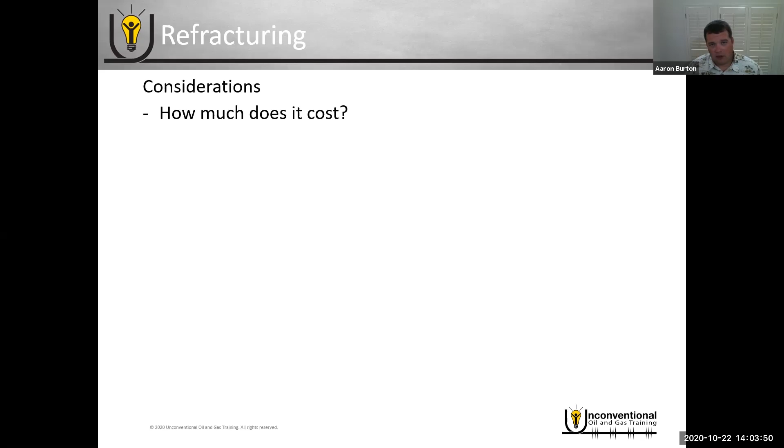So let's look at the considerations for refracturing first off. Especially when it comes to downturns, 2015, our current downturn, the main question is how much does it cost? If you look at unconventional wells, they're a little bit different than a lot of conventional completions because, in a lot of conventional plays, drilling can be 70, 80, 90% of the overall well cost, whereas in unconventionals, it's about a 50-50 split. And in some cases, the completion cost can actually be higher than the drilling cost. But if we just assume it's a 50-50 split...

...you still have that level of uncertainty as far as will the refrac work? A lot of the uncertainty revolves around why did the production decline in the first place? It's very difficult to kind of pinpoint that, which also makes it difficult to determine the likelihood of success with refracturing as well.

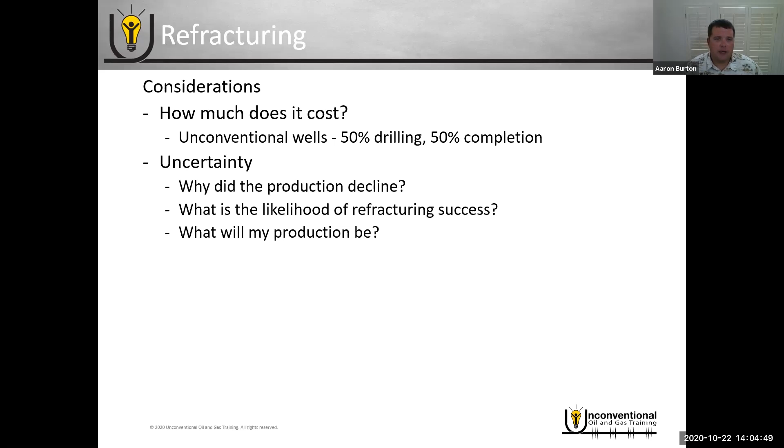So those are kind of the unknowns with production results. The main question really and truly revolves around production decline, which can be anything from proppant crushing to proppant embedment to scale, things like that. And the reality is the best we can do is make an educated guess, but that is what it is. It's still a guess in most cases. So we're learning a little bit more about these plays, and it'll be very interesting to see what evolves. But overall, at least from what I'm seeing on my end, the discussion right now in October of 2020, refracturing discussions are still happening, but refracturing activity is not happening as much.

My general observation when I talk to operators is that when we hit steep downturns like we're having right now, or like in 2015, operators become more risk averse. They look at it and say, theoretically I could refrac a well at 50% of the cost of a new well, but I don't know what the results will be. I could get no results and waste that money. But if I drill a new well in a formation I know well, I have a good idea what production will look like. So they take the mentality of let's just drill and fracture a new well and get competent results. I expect that to change as we learn more about refracturing and become more confident in it. I think this will be a big topic going forward, especially as the industry recovers.

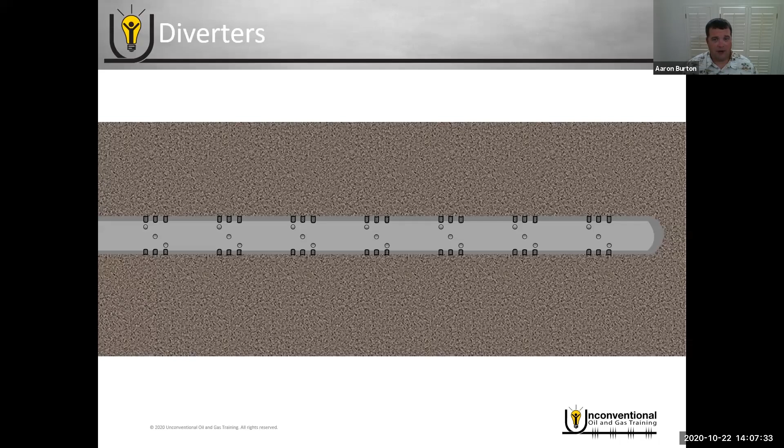So far, one of the more common ways operators have attempted refrac is diverters. This is very similar to the intra-stage diversion we looked at with plug and perf, except instead of 6 to 12 clusters in an individual stage, now you may be looking at hundreds of clusters throughout an entire well bore. It's a grossly oversimplified assumption, but for the most part operators just assume they place one big frac job down this well bore with multiple holes, and they have to assume most of the fluid and proppant go out of one set of perforations. So they'll pump the fluid and proppant they want for that section, and then pump enough diverter to block off the near well bore and force the fluid to divert out of another set of perforations.

As an added comment, these perforations may not be just the original completion perforations. If you went back to a well that was 10 years old in the US, the perforations may have been spaced 200 feet apart, whereas modern completions are typically 20 feet, give or take. So if operators go into one of those wells where each perforation is 200 feet apart, they may run a bunch of wireline runs and add perforations to the well. So you may actually be trying to stimulate new perforations as well as old ones from the original completion.

Once you pump down that other diverter, it forces the fluid to divert into yet another perforation, and they just repeat that process. Like I said, it's a grossly oversimplified assumption to visualize it this way, but outside of adjusting based on what they're seeing pressure-wise during the refrac, that's about all they can do — make an educated guess and certain assumptions. Overall, the upfront cost is relatively cheap for diverters and it's relatively simple, but the uncertainty is how well you're distributing your refrac.

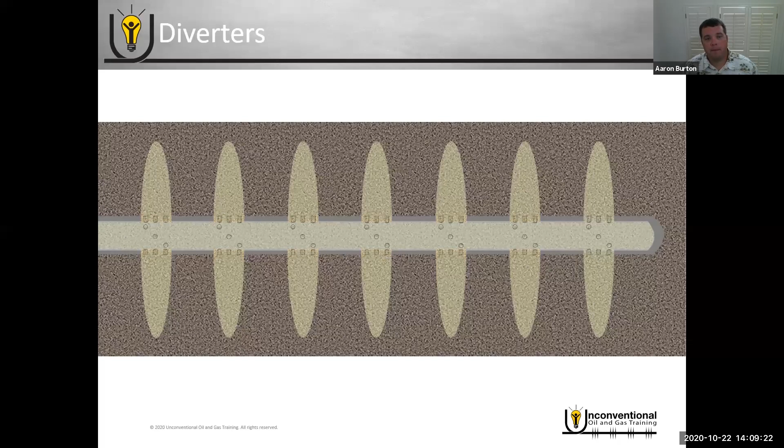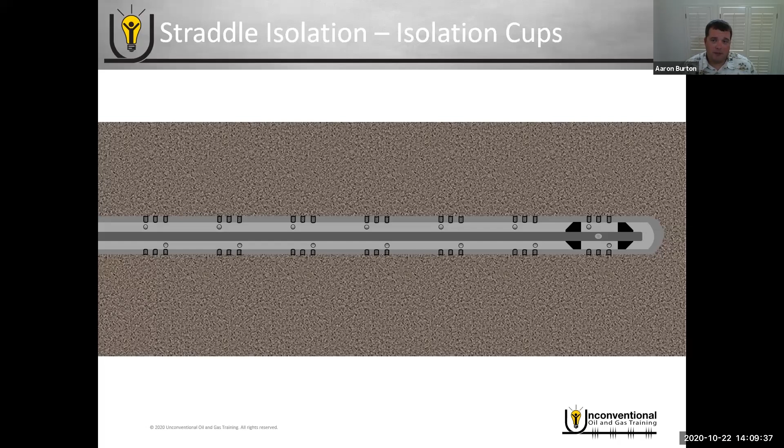Another technique is straddle isolation, and there are a couple of different ways to do this. It can be as simple as isolation cups — if you're familiar with swab cups, it's essentially the same thing. You have an upward facing cup and a downward facing cup, and you pump your frac job through a work string with the cups isolating. If you're using the cups, they're always active and always isolating as you move up the well bore.

One of the challenges with using the cups is what if, during your refrac, your stages start communicating, and now you dump your refrac back on top of your work assembly — that can create some challenges. Really your only option here is to try to pull up, use the force of the drilling rig, rip off the cups, and just recover your string.

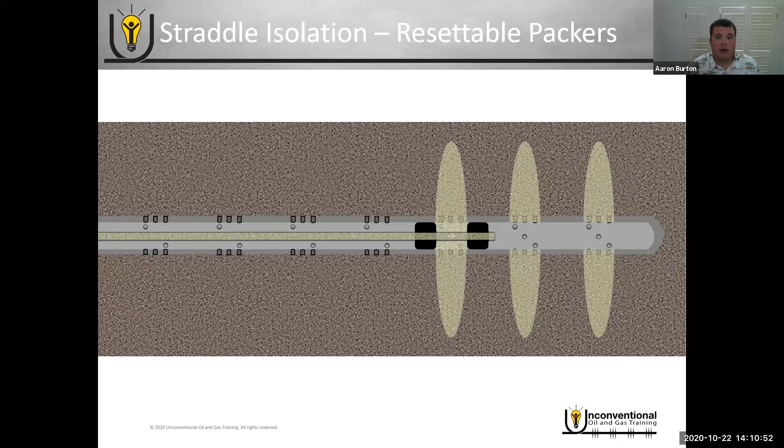So the other way to do the straddle isolation is use resettable packers. Same overall concept, except now you have the ability to set and unset the isolation devices. You run in with your resettable packers, set them to isolate, unset to move to the next stage, reset them, and pump your refrac job through your work string. With this setup, if perforations start communicating from the refrac, you can unset the packers, circulate out the excess sand, and then recover and move on up your wellbore and continue your refrac.

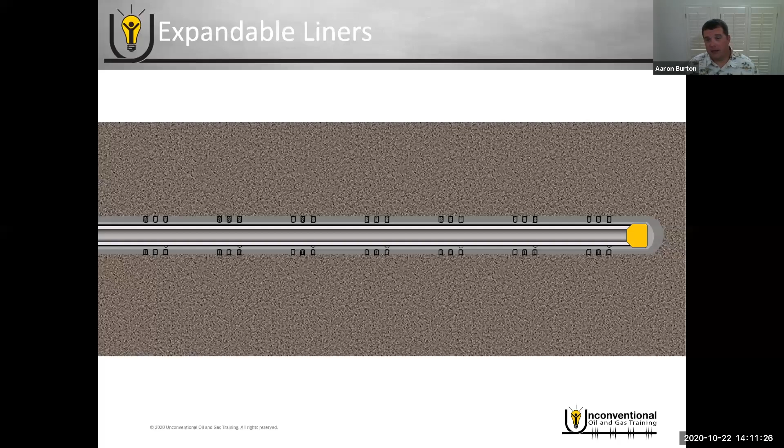Another option is expandable liners. This is a very ductile joint of casing, I believe typically J55 grade. It's a smaller string of casing that you run inside of your original completion casing. Once you get to the intended depth, you'll run it in on your work string. You'll have the expandable liner, which is that ductile casing string, and then your expansion cone at the bottom.

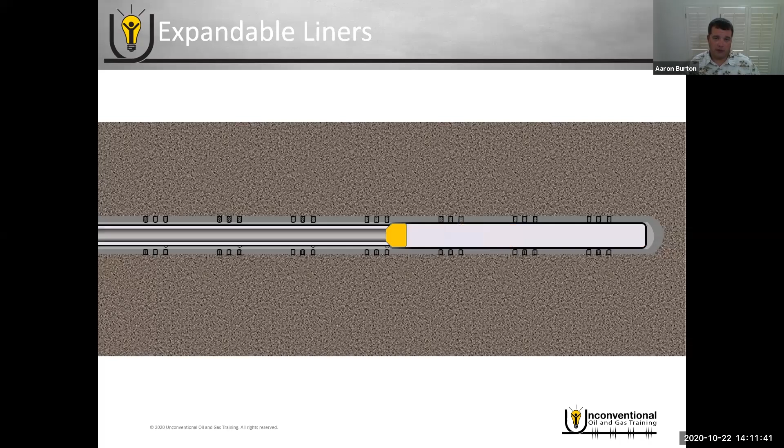Once you get to the intended depth, you're going to pull up with your work string, drop off that expandable casing joint or joints. Then you can see that expansion cone literally forces the expandable liner to expand out, touch the old casing string, and isolate. So you're just going to use the force of the drilling rig or workover rig to pull up that expansion cone and complete the expansion of the expandable liner. Once you've done that, now you have a re-isolated wellbore, and you can go in and do plug and perf operations as your refrac.

There's also a couple of options with... excuse me. Sorry, this is getting in my way here.

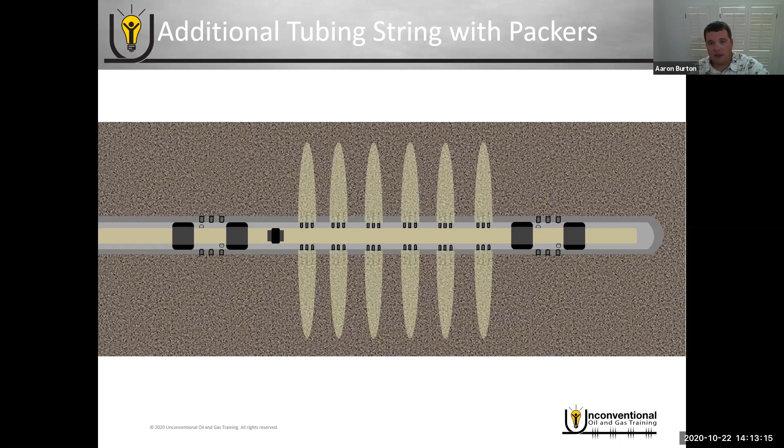There's also an additional option to run an additional tubing string with isolation packers. There's a lot of different ways you can do this. If we go back to the example of a very old well with perforations maybe every 200 or 300 feet, you may want to run in with these expandable packers and try to isolate each of the old perforations. Once you've done that, you have a good wellbore, and you can go in and do plug and perf between each isolated perforation. Most of the time in this strategy, you're trying to isolate the old perforations and create new perforations.

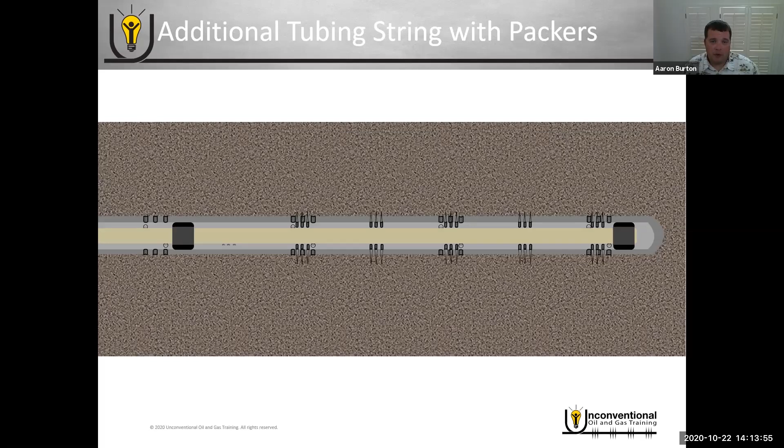But if you're in a newer well that you're refracturing, it's probably not practical if there's, say, 100 perforations in the well. If you tried to straddle each one, that would require 200 of those isolation packers, so it's probably not feasible economically. The other option is to go in with these packers and isolate segments of the well. You may isolate 3, 4, 5 perforations at the same time, cut off or isolate that individual section. Then you can add new perfs, use the existing perfs, whatever your strategy is, and refrac with a plug and perf through that additional tubing string.

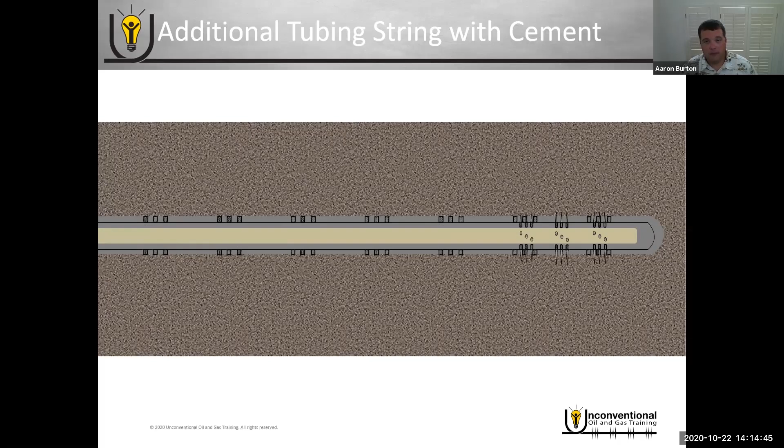Another option, and I know this was very common for certain operators in the Haynesville Shale, they would run an additional tubing string. If this was a 5.5 inch casing on the original completion, maybe they would run in with a flush 4 inch joint or 3.5 inch casing string into the old completion system. They would pump cement through that tubing string, which would provide isolation on the annulus. So you would isolate the old completion string, and now you have a completely isolated liner again, and you can go in and do a plug and perf job into that smaller new completion for refrac.

Then afterwards, you mill out the plugs, just like a typical plug and perf, and put the well in production.

Another option is to use an additional tubing string with gel. In this case, it looks exactly like before: we run a smaller tubing string inside the liner or inside the original completion. Now instead of cement, we put in a gel that isolates the annulus. The gel has the same functionality as the cement in isolating the annulus between the new tubing string and the old completion system. You go in, refrac, do your typical plug and perf work. Then once you're finished, you mill out the plugs and you can spot acid on this gel. It'll dissolve the gel, and now you can retrieve that tubing string out of the wellbore.

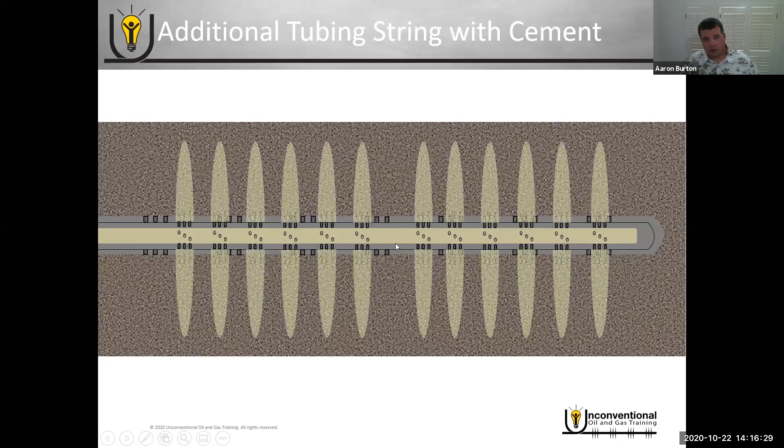The idea here is that you can do multiple refracts with this type of system because you're removing the tubing string from the wellbore. Whereas before, if you cement it into place, you might be able to get one more tubing string inside of this one if you wanted to do a refract, but then you'd have to add another layer of cement. At that point, you have to wonder if you're going to find perforations that can penetrate through 3 layers of casing, 3 layers of cement, and into the formation. You might be lucky and get one more refract, but in a lot of cases with this additional tubing string, that is a one-time refract. So if you want to do it multiple times, the gel may be a better option for you.

One of the caveats with the gel as well, you are removing that additional tubing string, but you have to remember that you're fracturing through the original completion again, adding perforations to it. So wellbore integrity in the original completion could also be an issue if you try to do multiple refracts.

Another option for refract is the reclosable ball activated sleeves. With these sleeves, once you're finished fracturing, you can go in and mill out the ball seats, and that exposes a shifting profile so you can use coil tubing or a workover rig to go back and reclose all of these sleeves. That gives you a couple of options. The first one is you could go in and selectively open each one, fracture, and then reclose to get isolation again, and you just do that for each sleeve.

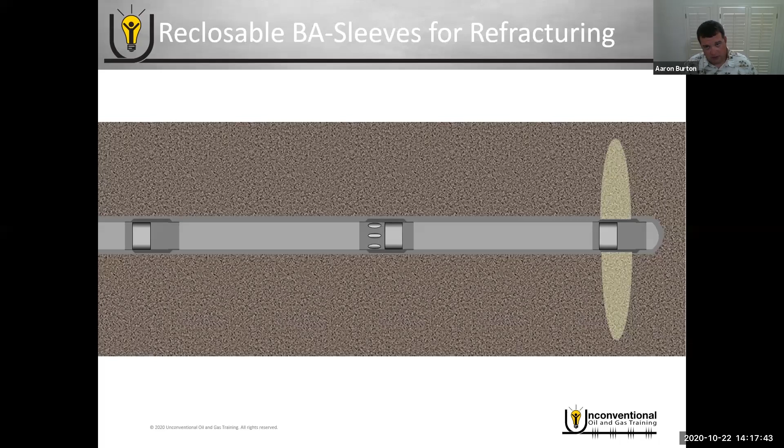The other option is you could go in, close all the sleeves to get isolation, and you could do plug and perf refract between the sleeves if you wanted new injection points in the well.

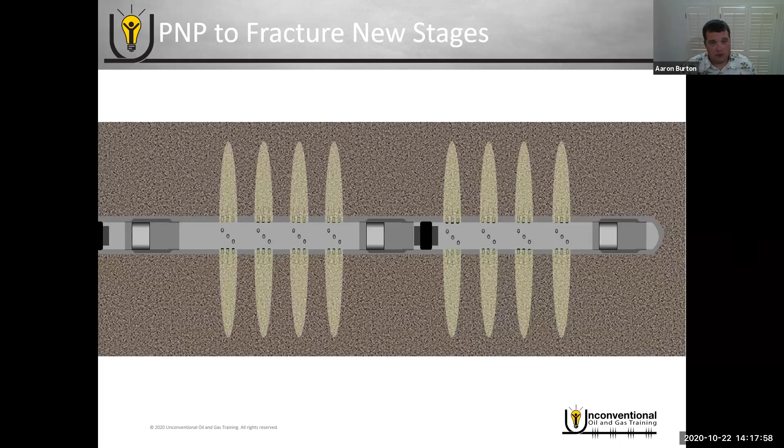Now, another system that's out there is reclosable ball activated sleeves, but you can leave the ball seats intact while you're reclosing them. So you go in, go through the ball seats, pull the sleeves closed, and once you've done that, you can drop the exact same balls as you did before in the initial fracture, and do your refract that way.

Now, the caveat to this system is you're going to be limited, and it depends on which coil tubing size you have available, but assuming you can get about a 2-inch coil tubing unit, your minimum diameter that you can leave in the wellbore without milling out would be roughly 2 inches. That leaves you anywhere from 20 to 30 stages for this type of system. So a lower number of stages, but a very neat concept as well.

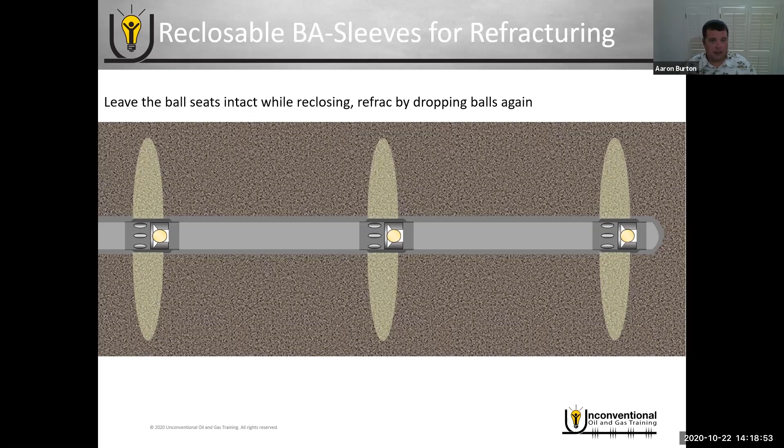Then you have the reclosable ball activated sleeves. You can go in, reclose all those sleeves. Once you've re-isolated, now you can fracture however you want to with it. You can do your traditional frac where you're toe to heel, or you can do your out of order fracturing like we talked about yesterday, where you're reclosing the sleeves. So the reclosable sleeves give you a lot of different options when it comes to refracturing.

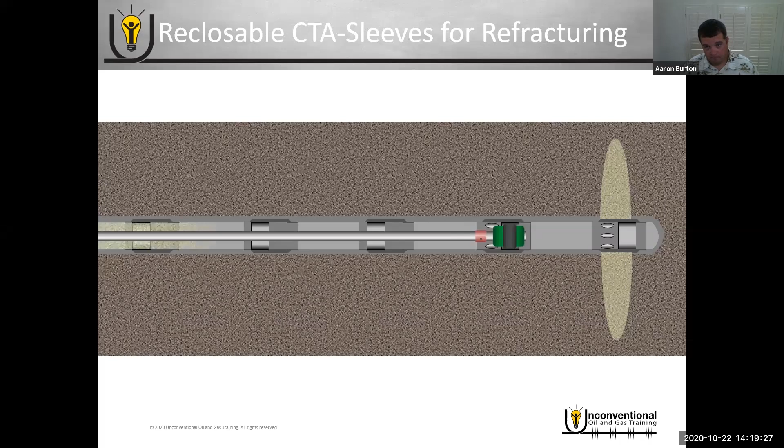But I will throw out a caveat for both the ball activated and the coil tubing activated sleeves. Very few have been installed, and even fewer have been reclosed and reopened. I think all the service companies that offer the reclosable sleeves have done an excellent job of testing them in the lab. But as we all know, the reality is the lab is not the field.

Crazy and magical things can happen when they're sitting in the wellbore, especially for years at a time. So, in my opinion, they're very much still in field trials. The coil tubing activated sleeves especially have had more installed and reopened and reclosed, but there's not a significant case history or volume of case histories on that either. So really it just depends on how much they can isolate, if they get complete isolation again, or good enough isolation, and then if they can be opened and reclosed multiple times. But in theory and on paper, that would be an outstanding option for refracturing.

Now, I don't know if you noticed it or not, but so far everything we've talked about on refracturing has been in cemented applications. Theoretically, all the options I'm talking about can also be used in open hole refracturing, but you have a couple of different things to consider with open hole.

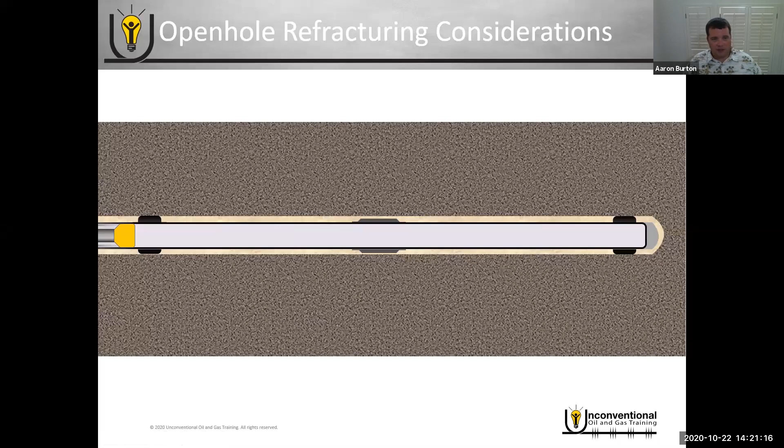Let's say, for example, you go in with an expandable liner in a situation that was open hole, and let's just say this is one of the older systems, so maybe this is a 500-foot stage, 500 feet between each packer. You run in with the expandable liner, you set it, you isolate completely through tubing. Now you've isolated off all of the old frac ports here, but you still don't have any isolation through this original annulus. So what happens when you go in to do a refrac with plug and perf, you intend to fracture there, but the path of least resistance is actually there.

So then you go back in, you isolate your next set of perforations, you've actually already refractured that area. So it is something to consider when you're doing refracs in open hole. Can you get the original annulus isolated, and at least isolated well enough to successfully execute your refrac?

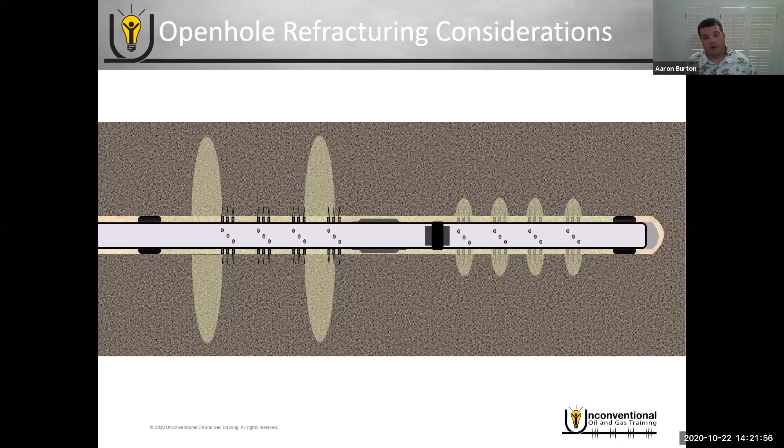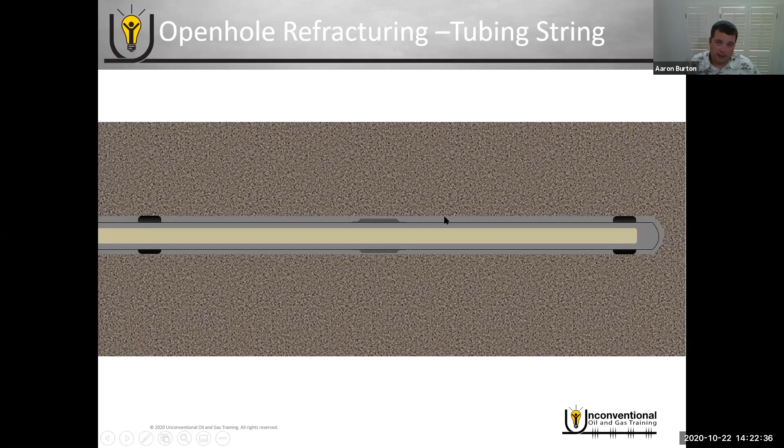One of the techniques that I've seen operators at least try, I consider it still in field trials because I don't know that there's enough out there to say definitively that this works well. What they'll do is run in an additional tubing string, pump cement through it, but instead of just trying to isolate the new annulus, they'll actually pump cement back towards the heel and try to let it gravity feed into that old annulus, trying to get some isolation into the old annulus so that you can have a successful refrac. Hopefully, if it works properly, you isolate your stages properly again.

So that was just a really quick overview of the refracturing options. Like I said, especially when you're talking about refracturing selection, it is most definitely a complicated subject. But we've learned a lot in the last 5 years. I expect us to continue that learning curve, and I think that refracturing will be very successful in the coming years.

All right, so at this point in time, we're going to shift to the completion comparison. Each of these completion systems, what we've talked about so far and what I hope you've picked up - and by the way, if you're taking the quiz, I would highly recommend paying attention on this slide.

So first off, we have thousands of runs with each of these systems, so they provide effective multi-stage isolation. All three of the systems have proven that, no doubt.

Now, all of the systems can isolate with either cement or open hole packers. You can do open hole plug and perf, you can do cemented sleeves. So if you're in a situation where cement or open hole packers is a better fit for annular isolation, it doesn't matter, you can use all three systems for isolation.

All of the systems can also be diverted with multiple or single entry point fracturing strategies. You can do single entry plug and perf, you can do multiple entry frac sleeves. So regardless of whether you want single entry pinpoint style fracturing, or multiple clusters trying to cover a larger space, you can use all three completion types. All of them have it set up to where that's an option.

And then obviously all of them do require different services in the field, which can play a big difference as well.

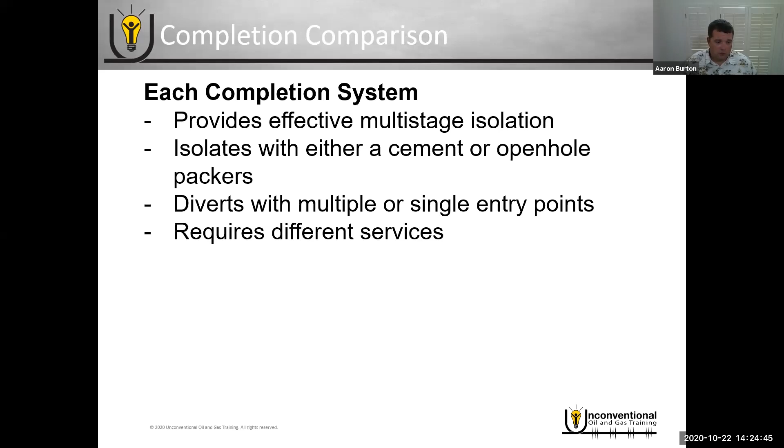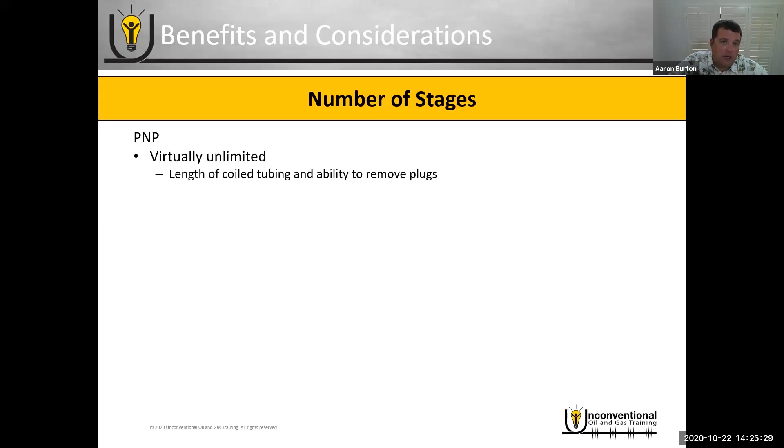So let's start with the number of stages. With plug and perf, we have a virtually unlimited number of stages. The practical limitations on plug and perf are going to be the length of coil tubing and the ability to remove plugs in longer laterals, so that could be a limitation there.

Now, one of the workarounds for that is to use a workover rig to remove plugs instead of a coil tubing unit. You can get more weight on bit with a workover rig, generally speaking you can get out further in the lateral, and it's easier to remove plugs. The overall process may be a little bit more time consuming than coil tubing, but overall the ability to mill out plugs can be easier.

The other option is to use a hybrid system that's interventionless towards the toe. This could be a composite plug towards the heel with dissolvable plugs towards the toe, or cemented multi-entry sleeves towards the toe, whatever you're choosing to make it a hybrid system, so you don't have to go out and mill out plugs in longer laterals.

With ball activated completion systems, with the traditional ones anyway, there is a finite number of balls and ball seats. We're going to use that 4.5-inch casing again, the most common application for these systems. Theoretically, you can get more stages with 5.5-inch casing, but because of the nature of the frac balls, the larger they get, the weaker they get. So you're actually not going to add many stages between 4.5-inch and 5.5-inch casing.

If you're using 4.5-inch casing, you can do 40 stages at 10,000 PSI. If you're able to do less than 5,000 PSI, you can do 65 stages.

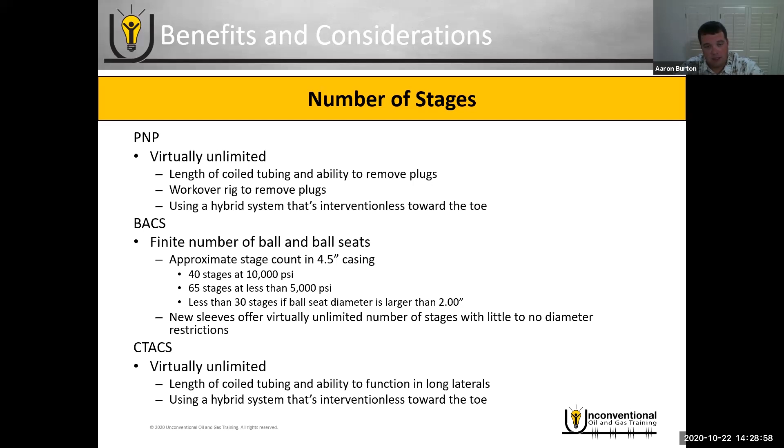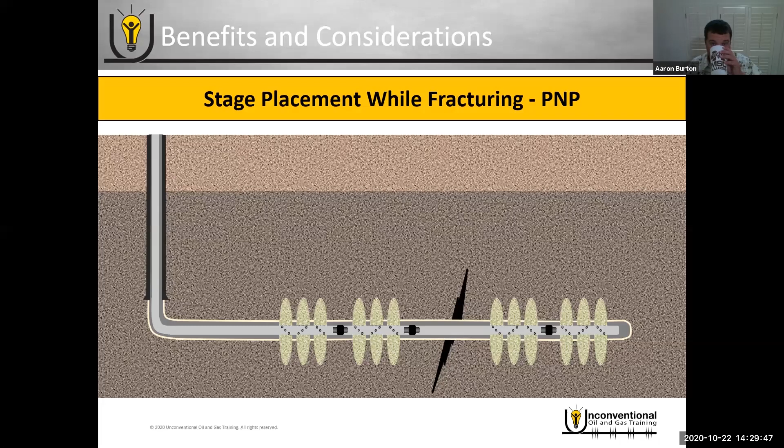Now, obviously, that's not an ideal situation because now you have a sleeve and a packer down there that you're not getting any value out of, but it's also better than wasting your time fracturing into a fault.

And then if you've constructed your wellbore with coiled tubing activated systems, your sleeves are where they are. So the only way to work around it is, once again, to just skip over the stages that would be affected and open the sleeves above it, then resume your frac job as you intended.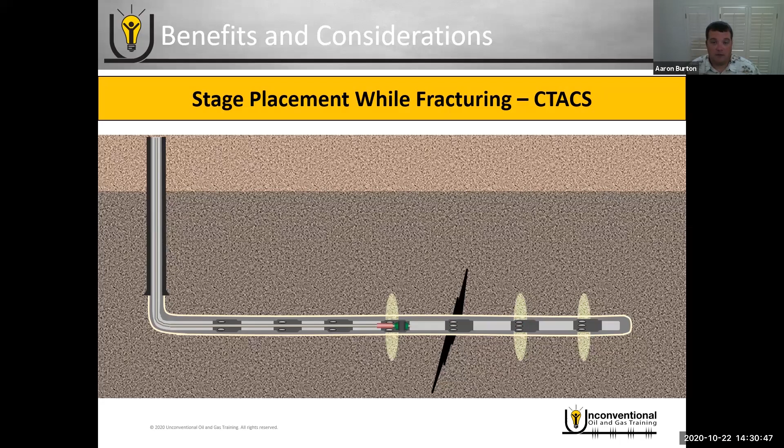Design flexibility while fracturing, plug and perf has a very unique benefit here because this is just a cemented casing string. So you can do whatever you want with this well bore, and you're not restricted by packer placement, sleeve placement, anything like that.

Let's look at an example. Say an operator drills a well, leaves it uncompleted for a year, and then a year later goes back to fracture it, but their modern completion design is very different. Maybe when they drilled the well, they were going to take this section and put 2 stages in it, 3 clusters per stage. Now their modern completion design for the same length of well is 1 stage with 6 clusters per stage. So you can do that. You have complete and utter flexibility to adjust your completion design based on your current practices.

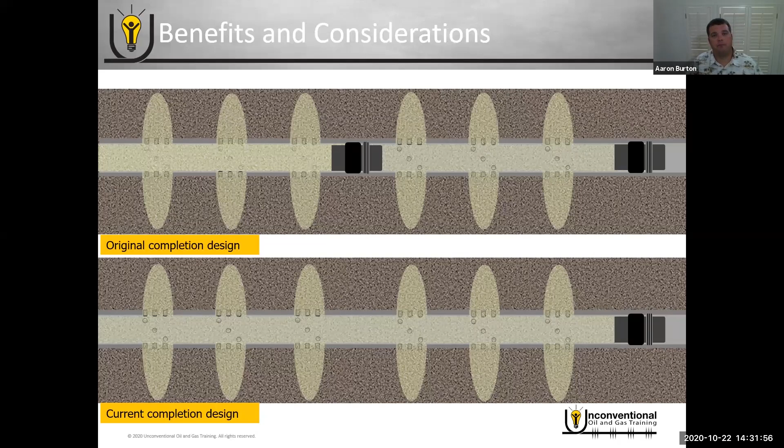Now with the ball activated system, your completion equipment is set. So if you wait a year or two to fracture this well, there's not really anything you can do as far as adjusting your stage placement and stage spacing. Wherever your equipment is set, that's where your stages have to be.

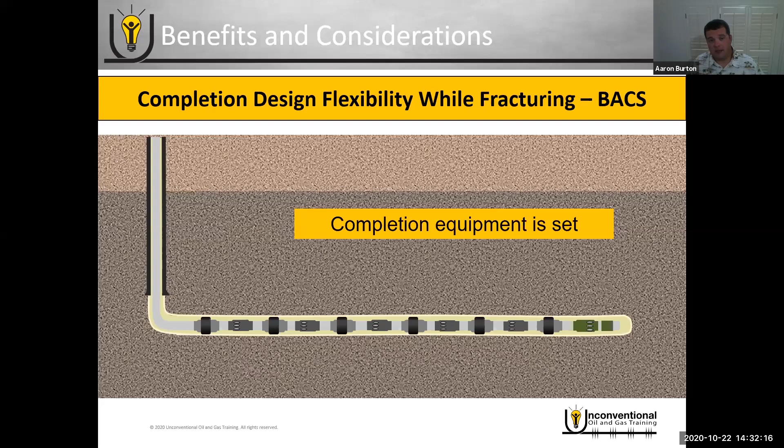With the coiled tubing activated system, same thing with the sleeves. Once the completion equipment is set, that's where your stages are, at least through the sleeves. But with the sandjet perforator, you do have some flexibility. If you decide the sleeves are spaced out too far, you could go in, sandjet perforate between the sleeves, and add stages on the fly during the frac job. So you mostly can't adjust it, but using the sandjet perforator as an alternate technique, you could do so.

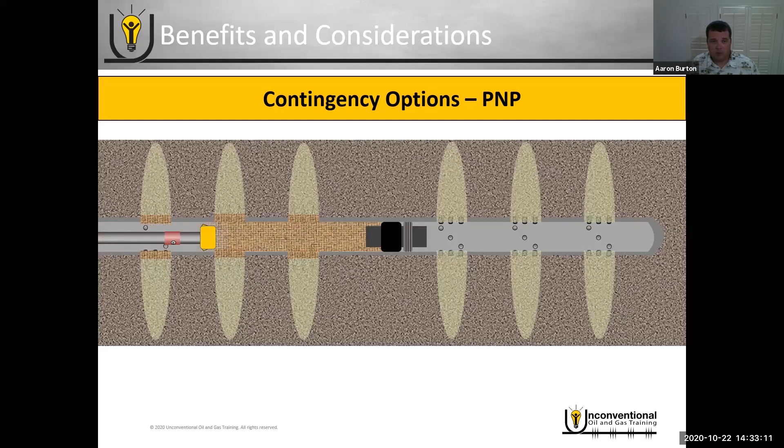Now let's look at contingency options, starting with plug and perf. If you're fracturing this stage and you screen out, you don't have any diameter restrictions above you. So you can shut down your frac job, go in with through tubing intervention, clean out that screen out, and then resume your frac job as intended. It really just depends on how readily available a workover rig or coiled tubing is as to how quickly that could happen. If you have it on location relatively quickly, great; if you have to wait 6 weeks, you're going to have to shut down and come back to that well.

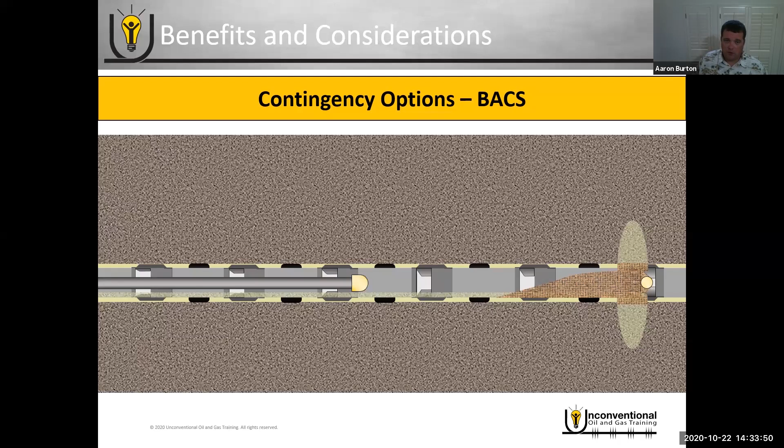The ball activated completion system: if you screen out while fracturing, you do have options, but they can be limited depending on exactly where you screen out. With a workover rig or coiled tubing, you can run in with a tool that basically mimics a frac ball. Let's say you have a 2-inch coiled tubing unit, so you mimic the 2-inch ball. You go down to that 2-inch diameter, set it on there, apply pressure down the annulus and force from the coiled tubing, shift the sleeve open, and resume your frac job.

That sounds like a great contingency option, and it probably is in this scenario when you're only skipping over 1 stage. The problem is, what if the screen out happens in a 65 stage system and it happens on the first sleeve of the well? If you go down to that 2-inch ball seat, that means you're probably losing 30, maybe 35 stages of your well. That may not be quite as attractive an option. So you really have to look at how many stages will be lost and how many you're willing to lose overall to make that decision.

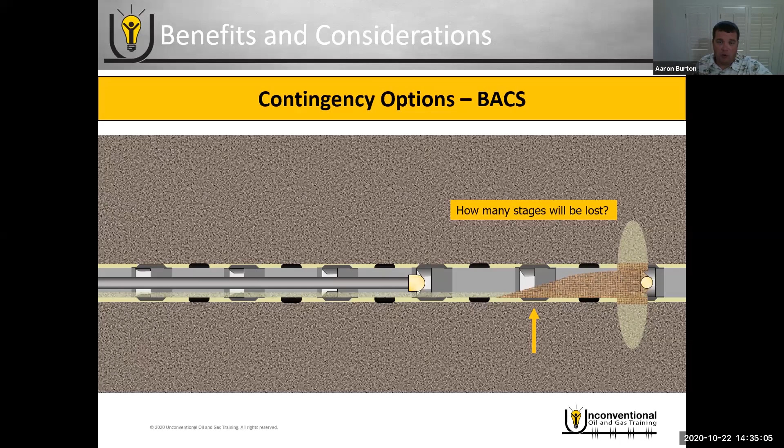Now if the worst case scenario happens and you're losing 30, 35 stages, or more than you're willing to lose, then the worst case option would be to mill out all the ball seats and do an open hole plug and perf for the remainder of the well bore.

Then with the coiled tubing activated system, this system hands down has the best contingency option. If you're in a situation where you do screen out, it has a unique feature in that you already have coiled tubing on location at the depth of the problem, with the ability to circulate through coiled tubing and through a sand jet perforator and/or a circulating sub, and you can wash that screen out back to surface and resume your frac job. So from a contingency standpoint, especially for screen outs, the coiled tubing completion system definitely has the best contingency options.

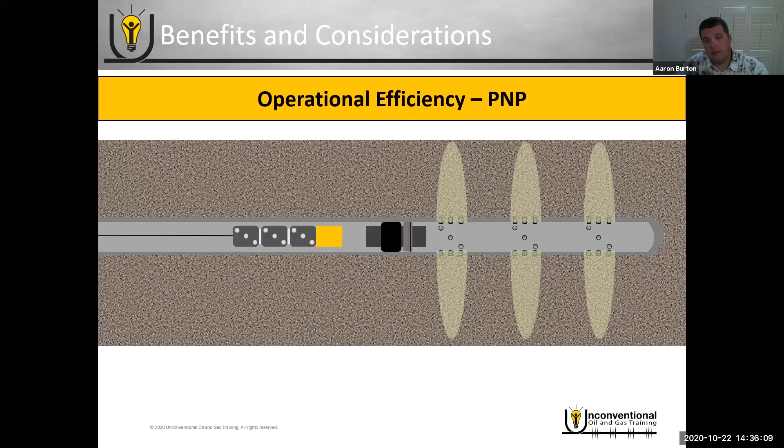If we look at operational efficiency, with plug and perf on a one-off well, it can be very low because between each stage, you're going to have to make a wireline run, set your plug, pull up hole. You'll have to perforate all of your clusters, and once you're through, you pull out of hole. Once you're out of hole, you resume your frac job. So it really depends on how good your crews are and how well things go.

It depends on depth, but the general rule of thumb I've heard from a lot of people is if nothing goes wrong and you have a really good crew, that's typically a 2-hour process at minimum. So if you have 100 stages, that's a significant amount of time.

But what we've seen with plug and perf, and to a large extent I attribute some of the success and the shift towards plug and perf in the U.S. to the fact that as U.S. unconventional plays have matured, they've started pad drilling, and the wellheads are really close together. So they can implement simultaneous fracturing operations, also known as zipper fracs.

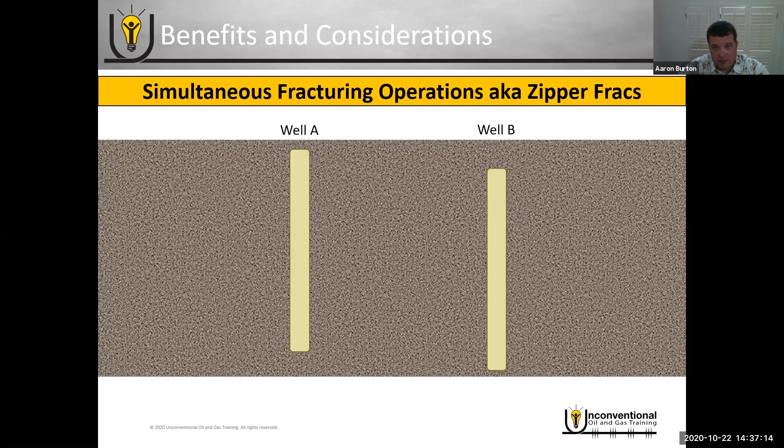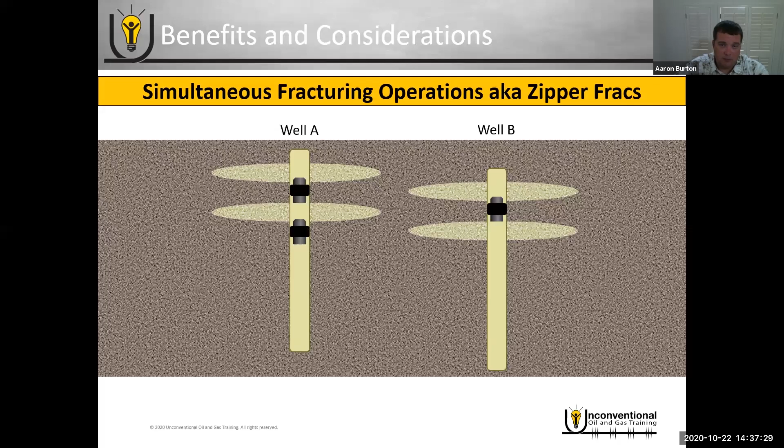What that allows you to do is pump on one well while running operations on the other. So you run wireline on well B while fracturing well A, then switch it over, running wireline on well A while fracturing well B, and just continue that process. Even if it's just 2 wells, that's a huge savings because your pressure pumping isn't sitting idle the whole time you're running wireline, and vice versa.

Operators have gotten really good at doing this, to the point where some publicly state they have no non-productive time between stages. They always have their frac crew and wireline running, and in some cases that'll be multiple frac crews and multiple wireline crews. But assuming everything goes right, it's a nonstop fracturing operation.

One of the highlights of the ball activated completion system is the operational efficiency at surface, because even if it's a one-off well, you're just continuing to drop balls in the correct order. You never have to shut down your pressure pumping, so it's very efficient at surface. There's no downtime between stages, assuming everything goes well as planned.

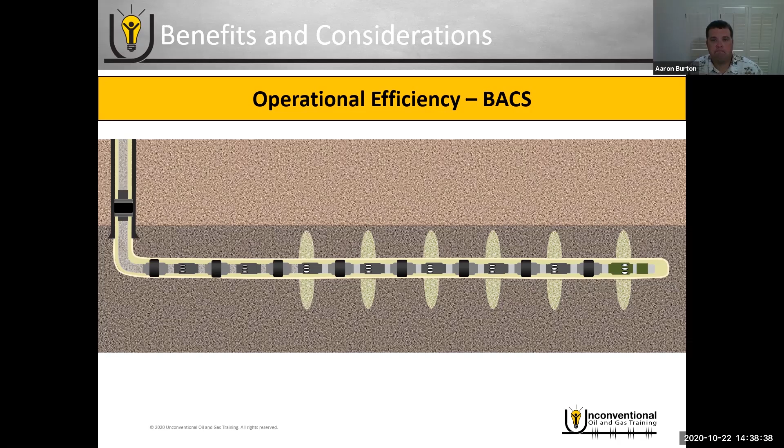With the coil tubing activated systems, you are going to shut down between each frac stage. You have to pull to release the packer, move up the wellbore, locate the next sleeve, open the next sleeve, and then begin fracturing.

You open the next sleeve and then begin fracturing the next stage. So once again, it's going to depend on the length between stages, how good your equipment is, and how good your crews are. But generally speaking, from what I've heard, with good equipment and good frac crews...

Kevin, if you want to stop and grab some water, I can cut that out in editing. Yeah, that's fine, I've got water with me. Okay, I appreciate it. I think I'll be okay. We've got a lot of weather changes in Houston, so it's got my sinuses messed up a little bit.

So, the transition between stages will depend on how good your crews are, but from what I've heard, with a really good crew on coil tubing and pressure pumping, you're looking at about 10 to 20 minutes between stages to unset your coil tubing packer, move up the wellbore, locate the next sleeve, and open it. So there is some downtime between stages, but in most cases it's a relatively small amount.

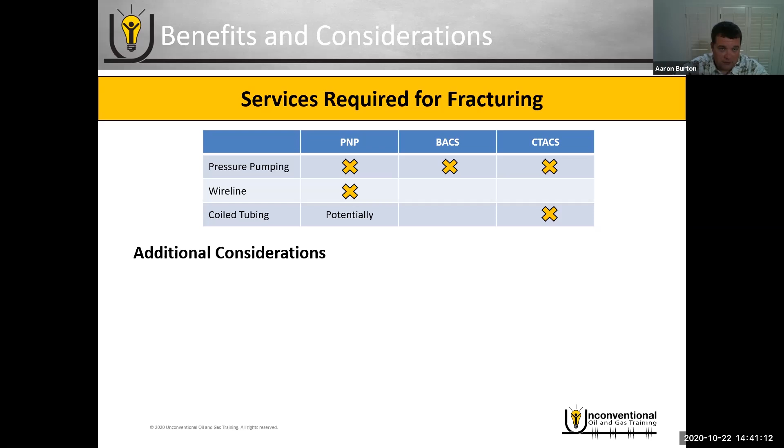But it's never as simple as which services are required for fracturing - you have to consider several things. Are wireline units available? Especially in international and emerging markets, you have to consider whether you have good enough wireline units available, or wireline in the country at all. Also, there are always finicky issues getting new products through customs.

In some of my past work with international markets, I've seen perforating guns especially get caught up in customs, where customs wouldn't release them because they seemed like military grade explosives or something along those lines. So if you can't get perforating guns into the country, then obviously plug and perf is not an option either.

Another thing is whether the right size coil tubing is available, and are the well sites accessible to coil tubing. It's one thing to have the right size coil tubing, but another to be in a mountainous region and not be able to get a large enough coil tubing unit on location to operate coil tubing systems or mill out frac plugs. At least in the stories I've heard, it's a disaster waiting to happen if you go in and try to mill out plugs with an undersized coil tubing unit.

Another option is a workover rig. Is it available? Is it a viable option? Can you get it into the mountainous regions or smaller well sites, and mill out plugs that way?

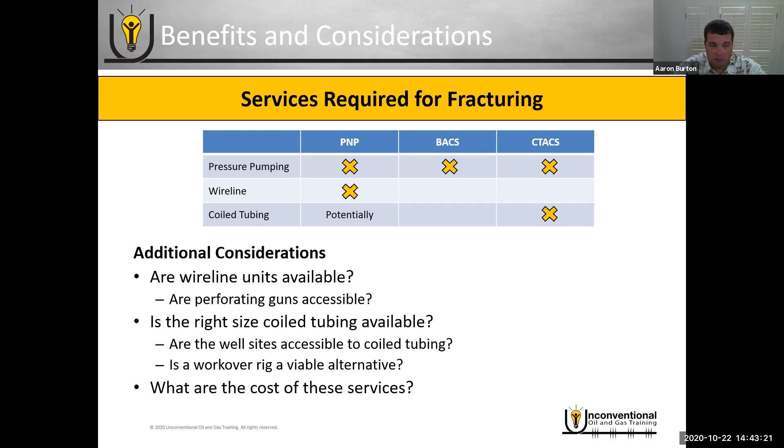It's also very important to consider the cost of these services, because that will play a huge part in your economical decisions. Years ago, probably 8 to 10 years ago, I was working on some completion cost comparisons, and coil tubing units were $40,000 a day in Oklahoma versus $100,000 to $120,000 a day in California. That's 3 times the cost. Especially with coil tubing activated systems where it's required all days on location, that can play a huge factor in your overall economics.

With post-frac operations for plug and perf, if you're using traditional composite plugs, which is still the preferred method, the plug mill out is required. But after you've milled out your plug, you'll have a full production diameter. An additional benefit is you also do a clean out run, removing any sand and debris left in the well after the frac job.

If you're using dissolvable plugs, there are no post-frac requirements. If they work as intended, they dissolve and remove themselves from the wellbore via the frac fluid and production fluids, but a clean out is optional. Right now, most operators running dissolvable plugs are doing the clean out option afterwards, mostly for two reasons: first, to make sure the dissolvable plugs are gone, and also to remove any sand and debris left in the wellbore so it doesn't hinder production.

With the ball activated completion system, there are no post-frac requirements. You can fracture through them and start producing right away, but you'll have a production diameter restriction because of the ball seats. If that's an issue, you can go in and mill out those seats to get a near full wellbore diameter again.

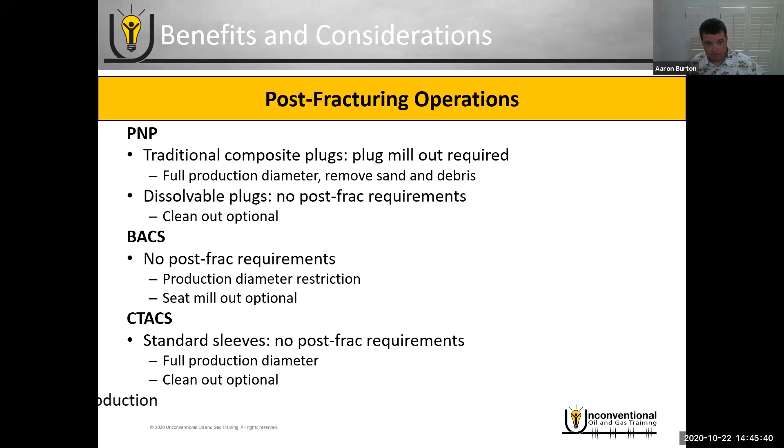And if you use the reclosable sleeves and reclosed them on the initial frac, once you're done you have to go back into the wellbore and open the sleeves up for production.

Now with refracturing options: with diverters, you can use them with all three systems: straddle isolation, expandable liners, tubing string with expandable packers, tubing string with cement, tubing string with gel. All completion systems can use those options. With reclosable sleeves, you have the ball activated systems and the coil tubing activated systems, but with the caveat that this only applies if they're installed. You have to make plans for that in the original completion and run the reclosable sleeves to have that option.

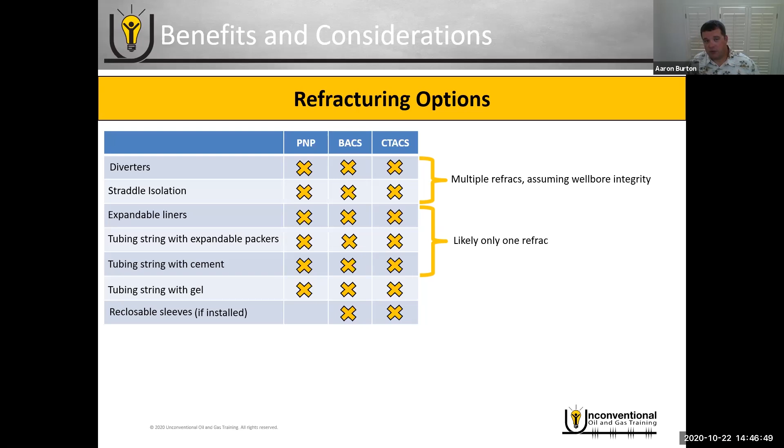Now, if we look at the diverters from the straddle isolation, you can get multiple refracts, assuming that you maintain wellbore integrity through the refracts. With the expandable liners and the additional tubing strings with packers and cement, you're likely to only get one refract because you're reducing the diameter each time you do one of these systems.

With a tubing string with gel, theoretically you can do multiple refracts, assuming that you maintain wellbore integrity in the original completion. And same thing with the reclosable sleeves, multiple refracts, assuming that the frac sleeves themselves can hold up to sleeve integrity.

And then for all three completion systems, if it is an open hole isolation used in the original completion, you do have to consider how effective the refract isolation is going to be. So all of these factors will play in.

So it looks like there's a lot of refracturing options for everything, and there is, but there's a lot of factors. It's more than just what can we do. It's planning for the future as well.

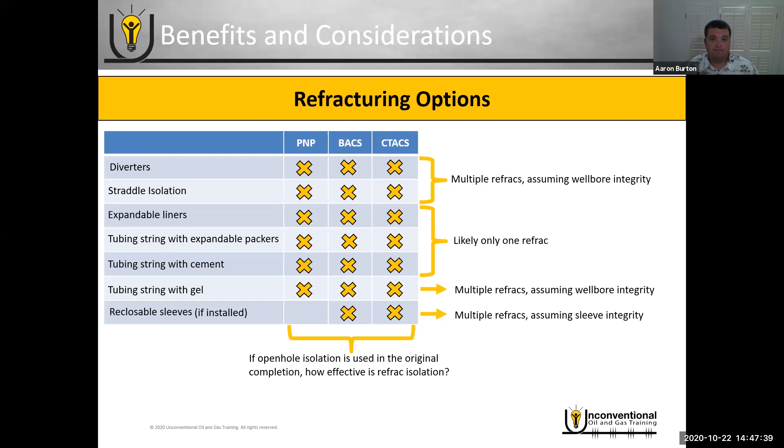So this is just everything we talked about. This is just a cheat sheet, all these things that we discussed side by side. So you can screenshot it and have your cheat sheet if that's useful for you.

And now we'll go into application comparison. So beyond the benefits and considerations, how do we choose the right completion system for our specific application? Just a word of warning, these are general guidelines, and I'll go through an example of exceptions to the rules.

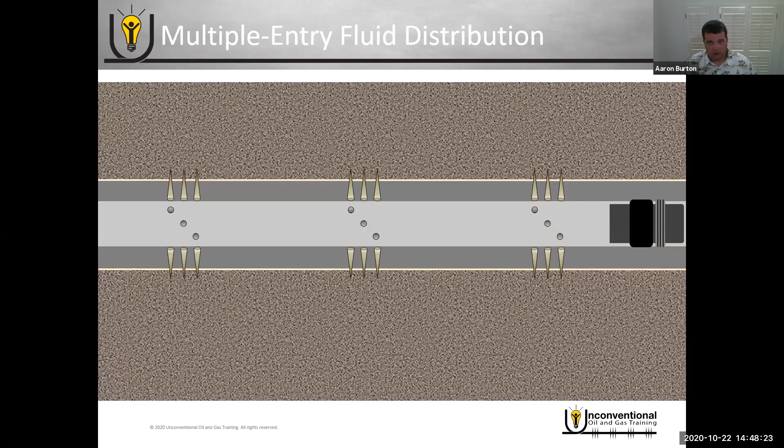So let's start by looking at multiple entry fluid distribution. If we go back to the 3 clusters per stage and the very basic theories of hydraulic fracturing, if you're pumping at 90 barrels a minute through 3 clusters, that means you're assuming even distribution, and you're assuming 30 barrels a minute per cluster, per injection point.

But if you're using single entry and want 30 barrels per minute per injection point, because you're only going out of one injection point, then 30 barrels a minute at the injection point is 30 barrels a minute at surface. So you don't have to have those high rates to achieve the same thing.

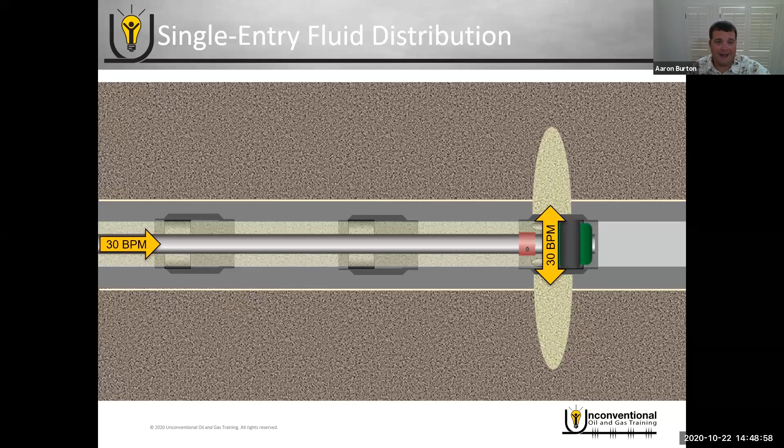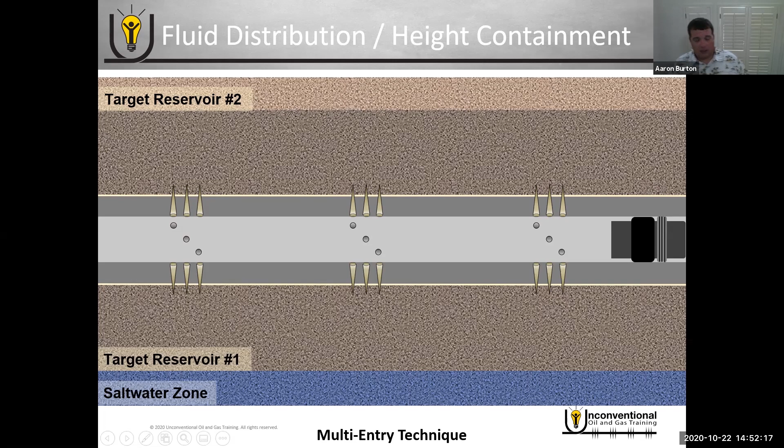So if you go with a multi-entry technique, the problem is, the risk is, what if your frac job looks something like this? We can apply diverters and limited entry perforating all day, but those don't affect the overall rock properties, and that's what dictates how the fracture is going to grow.

So there's two problems here. The first one is pretty obvious: if you fracture into that saltwater zone and maintain conductivity, then you're going to produce water, and that's going to significantly decrease the value of your well and increase the expenses of disposing of that salt water when it comes up.

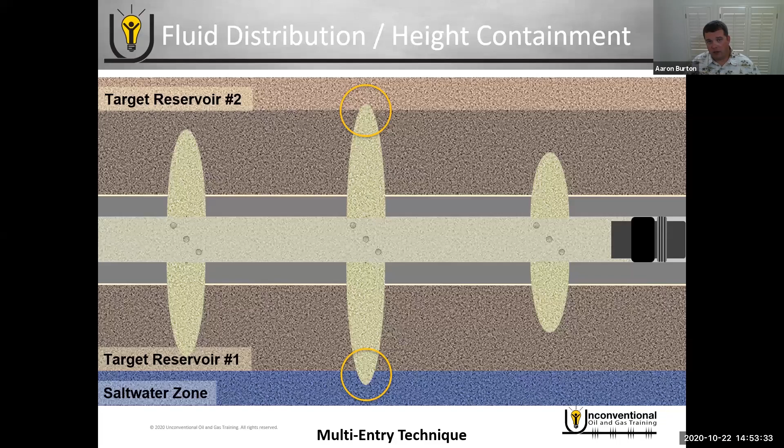But the second one may not be as obvious at first. What happens if you breach into target reservoir number 2 and start producing through that? You may get a great well out of it still, but what happens when you go forward a year or two later and start developing target reservoir 2, and realize you've been depleting it the whole time? That's going to cause you issues in the development of target reservoir number 2. It also probably means you didn't effectively drain target reservoir number 1 either. So overall, in the big picture, that's not a good situation.

Now, by no means am I trying to claim that you have direct control over height with the single entry system, because you don't. It's the same weak point in that the rocks are going to dictate how the fracture grows. But what you do have is direct control over how much fluid you inject into each injection point. It's not trying to distribute through multiple points, it's only the single point.

So if you have a pretty decent idea of how your fractures are going to grow, that gives you better control of your height containment. You could also do some real-time monitoring to try to make sure you don't breach out of zone, and if you are about to, you can adjust your fracture as planned. So no direct control of height by any means, but indirect control of height through the single entry point that you're fracturing out of.

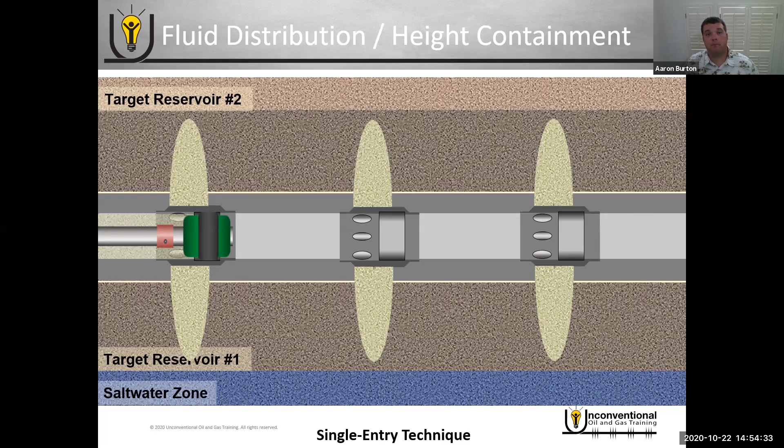So wells with longer laterals, 10,000 feet deep, 10,000 feet long. It's actually a pretty standard profile in a lot of the mature U.S. plays, but in emerging markets, that's still a pretty long well. The challenges with these longer laterals start with locating wireline and coiled tubing units with enough length.

Just to give you some reference: in the U.S., each state dictates its own weight requirements on the highways through their Department of Transportation. In Texas and New Mexico, where the Permian is located, to meet those weight requirements, a brand new coil tubing unit, the newer ones that are 2 5/8 inch diameter, fresh out of the factory, would be around 26,500 feet.

And that's rolling out of the factory. As soon as you start using the coil tubing, you start getting fatigue on that tubing, so you have to cut off 100 feet at a time, a couple hundred feet at a time, maybe a few thousand even. So even if you're able to get into a 20,000 foot total depth well, you may have issues trying to locate a coil tubing unit that has enough length to do so.

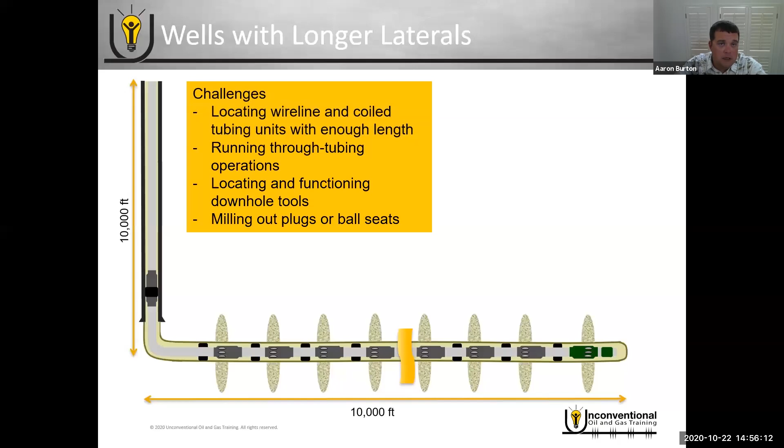Running through tubing operations can be a challenge. Locating and functioning downhole tools in these long horizontals, and of course milling out plugs or ball seats can be challenging too. All of these challenges point us in the direction of a ball-activated completion system or some sort of hybrid system, where you have dissolvable plugs at the toe or cementable ball-activated sleeves at the toe, something interventionless at the toe beyond the reach of coil tubing.

This is why I think the ball-activated completion system had a lot of success in the U.S. Bakken in the early days of unconventional development. In 2008, operators in the Bakken were starting to drill this profile of 10,000 feet long and 10,000 feet deep, and the technology of coil tubing, its availability, all the additional lubricating fluids, mills, motors, the technology just was not there compared to what we're doing today. We can mill out plugs very efficiently today, in the right application, but back then we weren't able to.

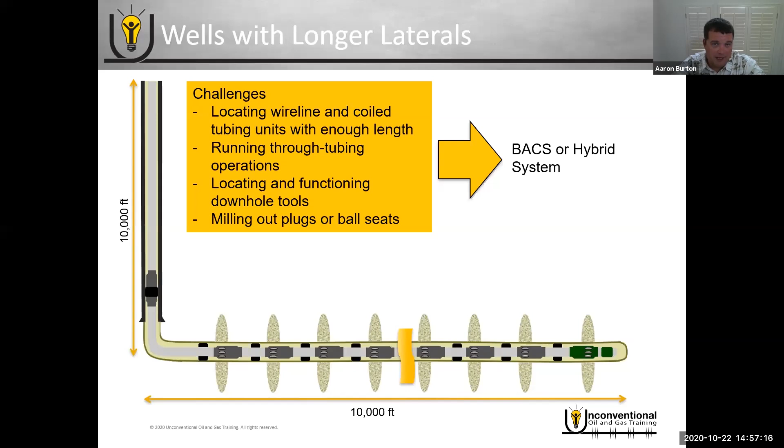So that's why it made a lot of sense for the ball activated systems in the US Bakken, because they didn't have to go in and intervene afterwards. They would drop balls to frac, put the well on production, and that was that.

Now we also have an extended number of stages. So the next two examples are obviously going to be very relevant to where you're at, whether it's a low number of stages or an extended number of stages. But using this example with 40 stages and the next one with 5 stages, I think you'll get the point. It illustrates how different each frac design can be.

So in this example, we're going to use a 40-stage system. We'll assume 1 hour per stage in the frac plan and no operational issues. So if we have the ball activated completion system, it's 40 hours total time to stimulate. That's 2 days with a 24-hour crew, 4 days with a 12-hour crew.

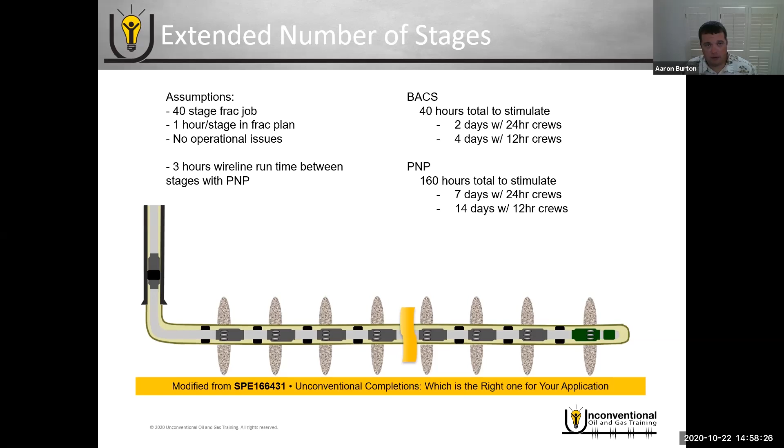Now, if we're looking at plug and perf, we have to make an additional assumption: we'll assume 3 hours to run in with the wireline, set the plug, perforate, and pull back out of the hole between stages. That means it's 160 hours total time to stimulate, which is 7 days with a 24-hour crew, 14 days with a 12-hour crew. So in this example, the ball activated completion system has a clear advantage over plug and perf, because you're taking the frac cycle time from weeks down to days.

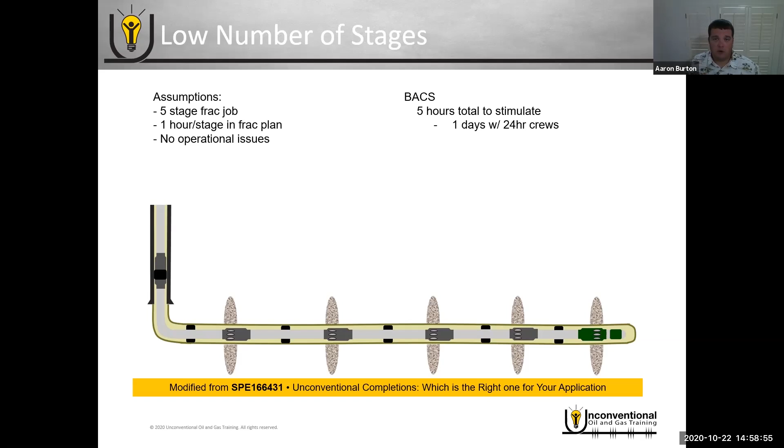Also, a low number of stages. Same assumptions, but now we're going to look at a 5-stage job. With the ball activated system, it's 5 hours total time to stimulate - a day with a 24-hour crew or a 12-hour crew. Plug and perf, with that same 3-hour assumption between stages, that would be 20 hours total time to stimulate. So that's a day with a 24-hour crew, 2 days with a 12-hour crew.

So in this case, it's virtually the same - there's not a significant difference in the operational efficiency at surface. So you really would have to look at the local economics and regional economics to decide which one is the best completion for that well or for that area.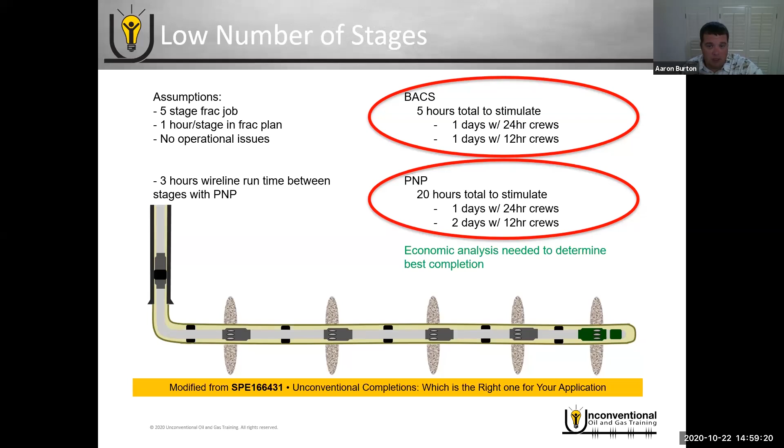So if we step back and look at the bigger picture, the appraisal phase in the asset life cycle is when an operator has basically obtained new acreage. They don't know anything about it really. Their objectives are going to be different than any other time in the asset life cycle, and their objectives are going to be to gather as much data as possible and overall to learn that formation in that field.

So there are certain risks associated with the appraisal phase. First off, you may not know exactly how you want to complete this well as soon as you're done drilling it. You may want to take your time, analyze things you saw during the drilling process, run some additional logs, things like that - take your time and apply a little bit of science. Also, it's a much higher risk of poorly drilled wells and screen outs during the frac, because you don't know this formation, you don't know how to drill it yet, you don't know how to fracture it yet.

So what are your ideal completion requirements there? First, a system that would allow you to adjust stage placement on the fly during the frac job and complete it however you want. A completion with no increased diameter with the completion tool - essentially no packers, no sleeves - so it's easier to get into the wellbore, even if it's drilled poorly. And a full diameter inside of the completion so that if you do have a screen out, you can go in with through-tubing tools and help recover from that screen out.

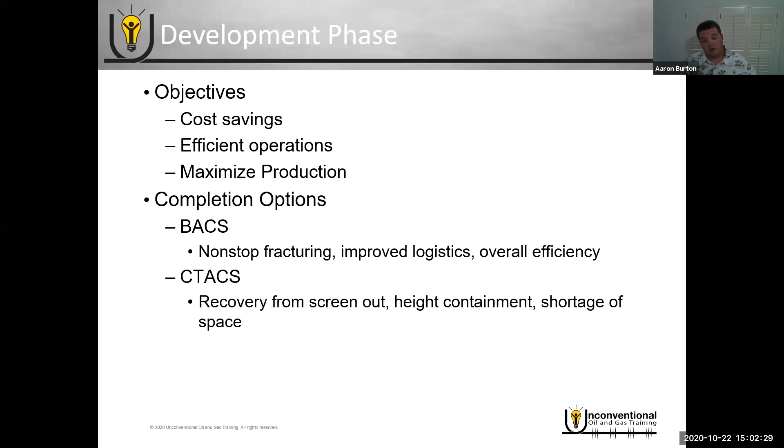And then, of course, plug and perf. Plug and perf is hands down still the most common completion system run out there in these applications. It was the original completion system that unlocked these formations as well. Throughout the years, we've significantly improved everything, especially the inefficiencies at surface, by being able to apply simultaneous fracturing operations, aka zipper fracs.

One of the big benefits now, especially since the 2015 downturn, is the flexibility of stage placement during the frac job, because we can allow that well to sit for 2 years and then adjust it to our modern completion design when it's time to fracture it. There's always going to be scenarios where one system makes more sense in certain areas over others.

So when I was working in the Northeast, in the Marcellus, one of my customers had been running plug and perf for over a year. We were talking with them, and they really wanted to increase their fracturing efficiency at surface.

So they tried 15 wells with the ball activated completion systems. We followed up with them. They went from 7 to 9 days with plug and perf to fracture, to 1 to 2 days with fracturing the ball activated sleeves. So they placed a large order for the ball activated sleeves. Oh, and by the way, their production was the same, no better, no worse, per completion system.

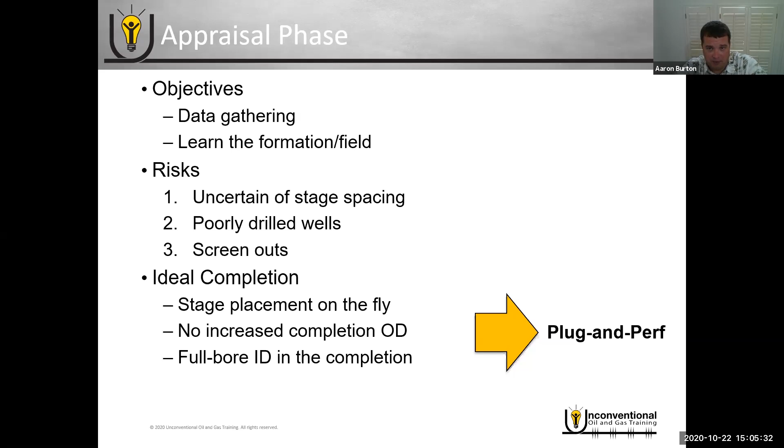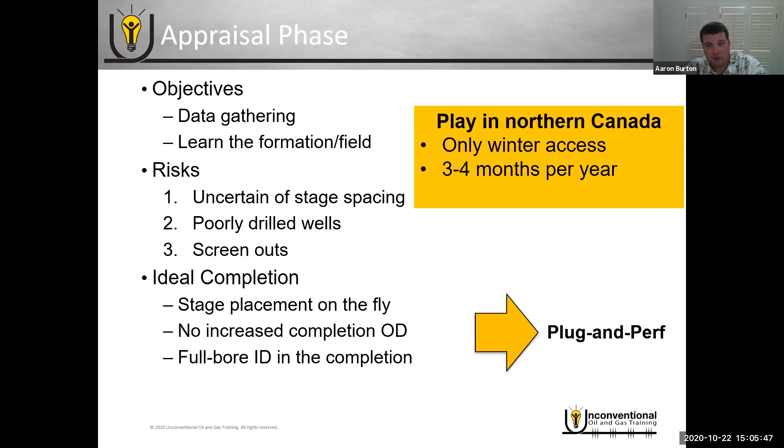So this was a very interesting application. It was a play in northern Canada. They only have access to it in the wintertime. They wait till it freezes up the marsh so they can get equipment out there, and they only have access to it 3 to 4 months a year.

So we sat down and talked about this, everything. And I said, well, okay, I've identified these 3 as your primary risks. So let's go through them.

So first off, do you know exactly how you're going to space your well? Are you going to do any science? Are you doing geologic spacing? And he said, no, we're doing completely geometric spacing. It's already been set, there will be no changes to it. So risk number 1 was not an issue.

So risk number 2, poorly drilled wells. I asked if they had any experience at all, and he said, yeah, we have drilled 8 wells there, haven't really had any issues. So overall, they've arguably figured out how to drill these wells, so that's not much of an issue.

So with screen outs, first thing, do you have coil tubing on location?

Because I suspected they would, because you're not going to wait months for coil tubing to arrive if something goes wrong. So of course, when they go out there, they do have coil tubing with their crews, and it's sitting there on location. So the other factor was, well, if you're going to use the ball activated system, how many stages do you have? It was less than 30, which means that due to the coil tubing size and the less than 30 stages, coil tubing can enter that wellbore and do intervention if a screen out occurs. So all of a sudden, screen outs aren't near as much of an issue as they would be.

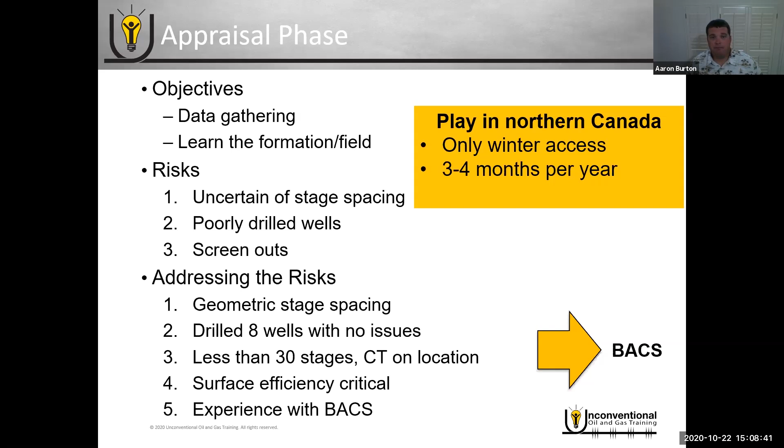So I get asked pretty frequently, do we have it all figured out? In my opinion, absolutely not. Especially since 2015, since the first downturn hit, and now the second really bad downturn with the pandemic here in 2020, a lot of decisions are being made based on economics and downturn economics, and it's important not to lose sight of that. So we have to consider the effects of the downturn on our completion decisions.

So we'll look at a Bakken example. If you go back to 2013, 2014, the state of North Dakota required Bakken operators to have 1 year between finishing drilling the well and fracturing the well and putting it on production. When the downturn hit in 2015, they extended that to 2 years. So there were several prominent Bakken operators that publicly stated, we will continue drilling so that we can hold our leases, but we will not be fracturing wells and putting them on production until we see oil prices we like, or until we have to after that 2-year period. So their overall strategy was to hold wells for 2 years before fracturing them and putting them on production.

Now, it's very important to consider, because when you're dealing with completions, especially downhole completions, it's a little bit interesting, because anything that's wellbore construction actually goes on the drilling AFE. The way most U.S. operators are divided, they have their drilling AFE, completion AFE, and production AFE. Everything done by the drilling rig is the drilling AFE and goes on the drilling budget. Well, wellbore construction is done with the drilling rig. So if you have cement, that's with the drilling rig. If you have sleeves, that's with the drilling rig. So you have to factor that in.

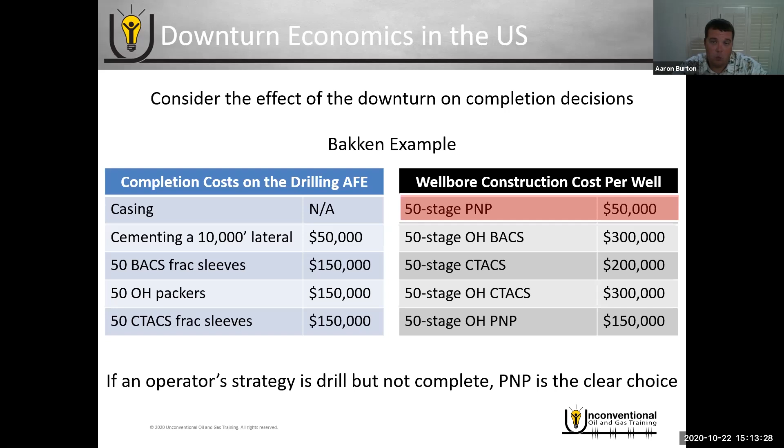So other downturn effects to keep in mind. When a downturn hits, cash is king. The primary objective is to break even on the well. Services are cheap and readily available. And there's also a human nature aspect to it, where people want to keep people working, so they'll lower their prices and keep people working.

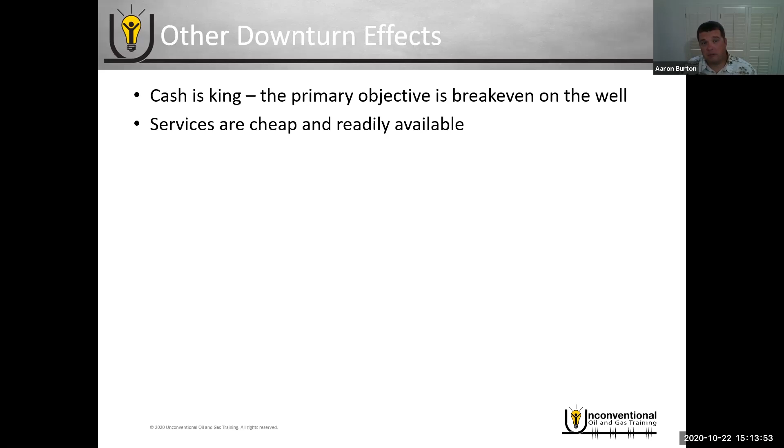There's also a lot less tolerance for failure because people are afraid they'll lose their job. And that leads to not a lot of experimentation with new completions. The interesting dynamic is that a certain level of failure is tolerated with traditional completions. So if a completion engineer has issues with plug and perf, but they've been doing it for 3 years, if a plug presets or a perforation doesn't fire or there's any other operational issue, there's a certain level of failure tolerated.

As long as it doesn't happen too much, it's just expected. We're going to have issues in the field occasionally. But if that same completion engineer tries out a new completion system and it fails, then they're afraid they're going to lose their job because of it. So because of that dynamic, it doesn't always lead to innovation with trying new completion systems.

Now, none of this is necessarily a bad thing. Keep in mind, especially—and really this is throughout the world—we have record initial production in these wells, in these unconventional reservoirs. But there's a lot of things to keep in mind with that.

First off, record amounts of fluid and sand have been pumped into these wells. What we're doing today is not even close to what we were doing in 2014. Once the prices of fluids and proppants lowered after 2015, operators started experimenting more and more. So these are a lot different fracs than what we had before. Overall, because of that, the completion strategies today can't be compared to before the downturn.

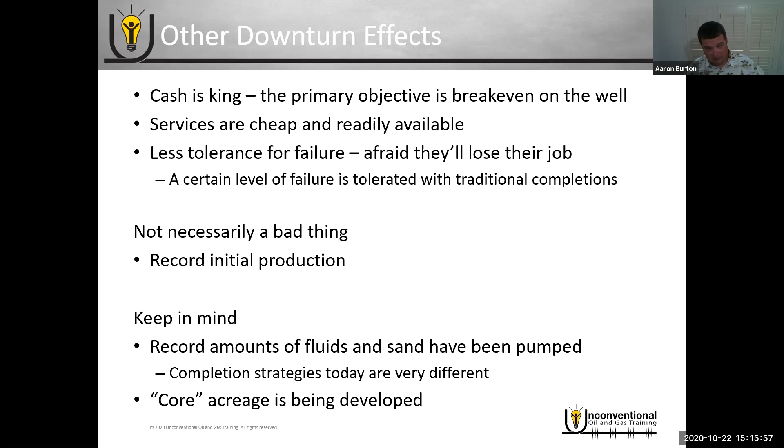Another key factor to remember: the core acreage is being developed right now. What I mean by that is the best of the best acreage, the acreage that operators know will perform and that they know they can break even on—that's what they're doing. So they've dropped off the tier 2 and 3 acreage and focused on their core acreage. By default, that's going to lead to record initial production.

Now, tying it back into the fracturing itself, the downhole completions into the fracturing, it's important to remember fracturing logistics. Besides the pressure pumping, what other services are required for the job? What are the costs of those services? And do the nonstop fracturing operations have any benefit—whether with the ball activated systems or with zipper fracturing with plug and perf as well?

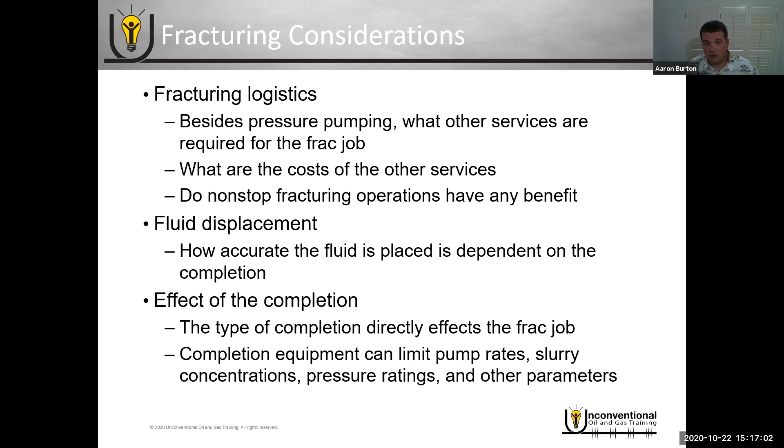Your fluid displacement: how accurately the fluid is placed is directly dependent on the completion system, whether it's single entry or multi-entry. And then the effect of the completion—the type of completion will directly affect the frac job, because the equipment you have downhole can limit your pump rates, slurry concentration, pressure ratings, and other parameters. You don't want to design a great frac job and then not be able to execute it because you don't have the right equipment in the wellbore.

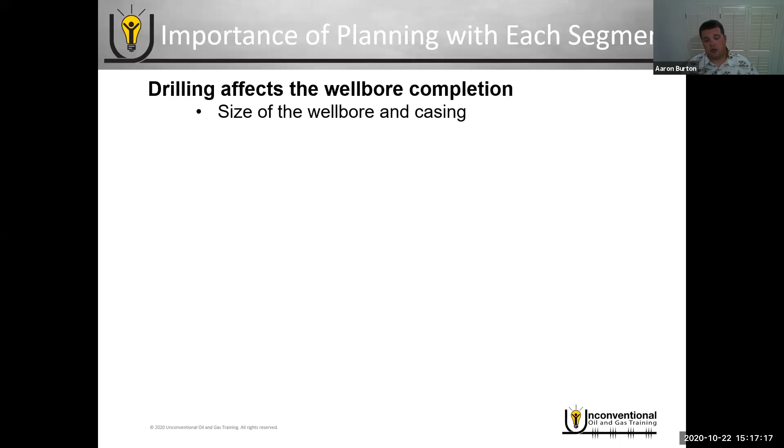And to bring it all together and tie it all in: drilling, completions, fracturing. Drilling directly affects the wellbore completion. When you're drilling the well, you're determining the size of the wellbore and the casing, so you have to be sure that's compatible with your completion design. And if you drill poor quality wellbores, that's going to have a huge impact as well.

First, it'll be difficult to land the completion at the intended depth if you can't get it into the wellbore because it's drilled poorly. And also, you're going to have difficulty achieving annular isolation with cement or open hole packers if the well is drilled that poorly. So yeah, it all depends.

Just to give you an example, when I was in the Marcellus, one of my customers decided to cut corners on drilling cost. They hired the cheapest directional drilling company they could hire, and it ended up costing them in the long run because they could not get 5.5 inch diameter casing into an 8 3/4 inch open hole, because their wells had a ton of undulations, a ton of spiraling in it. They ended up having to do a reamer run to get the casing in the wellbore, even without packers and sleeves on it, just a cemented casing string. So they ended up paying more than they intended by cutting cost.

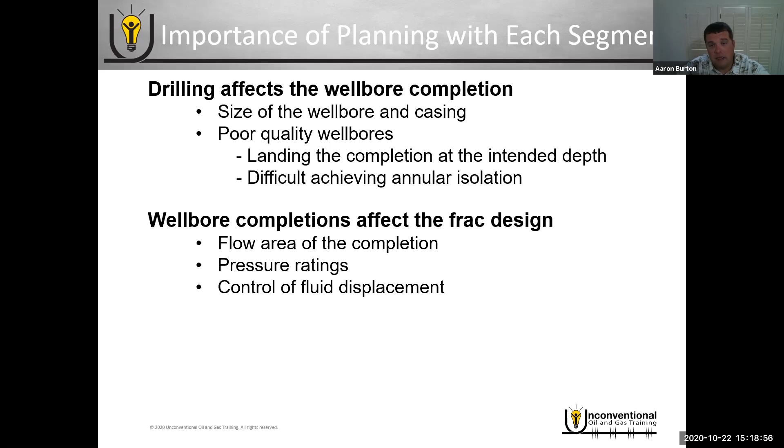And to close it out here, this is almost a repeat of last slide, but once again, very, very important. Your wellbore completion directly affects your frac design because you control the flow area of the completion, pressure ratings of the overall system, and how much control you have over the fluid displacement. So it's very important to make sure that what you're doing with your wellbore construction, your wellbore completion, is compatible with your frac design so that you can execute it as you intend to.

So that's it for this course, for today. What I hope you've learned through this course is there are 3 viable options in the unconventional plays. It's very easy, and people do this a lot, in my opinion it's a gross oversimplification to say, well, the US is running 95% plug and perf, so plug and perf must be the best completion system. I don't think that's necessarily the case. It's going to very much depend on everything. It's because of the dynamics of the downturn, the dynamics of zipper fracturing, things like that, why it has been the most effective and preferred completion in the US. But that's not always going to be the case throughout the world and throughout other places in the US for that matter. So that's what I hope you take from this, that all three of these are viable options. It really just depends on your situation as to which one is best for your application.